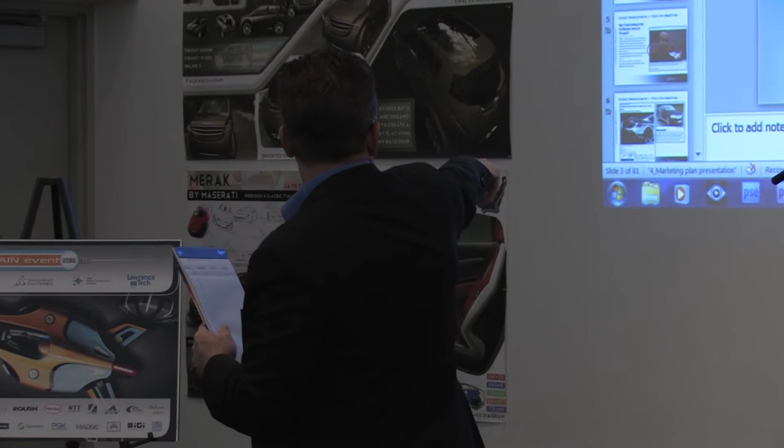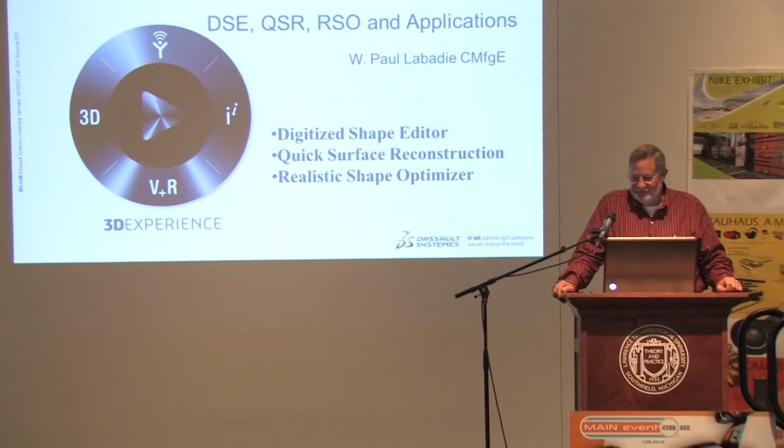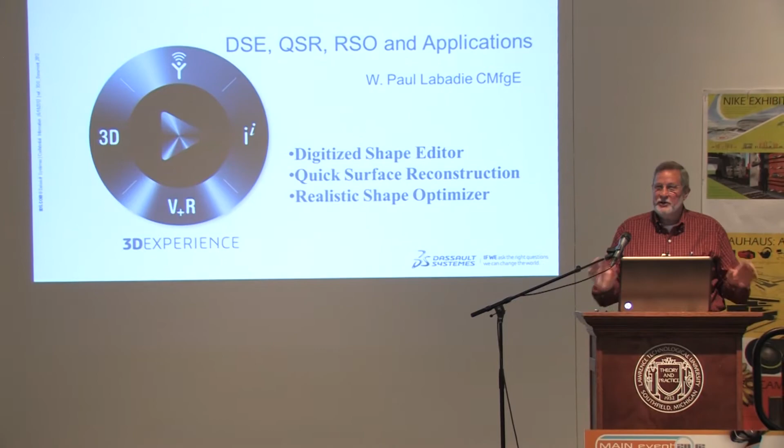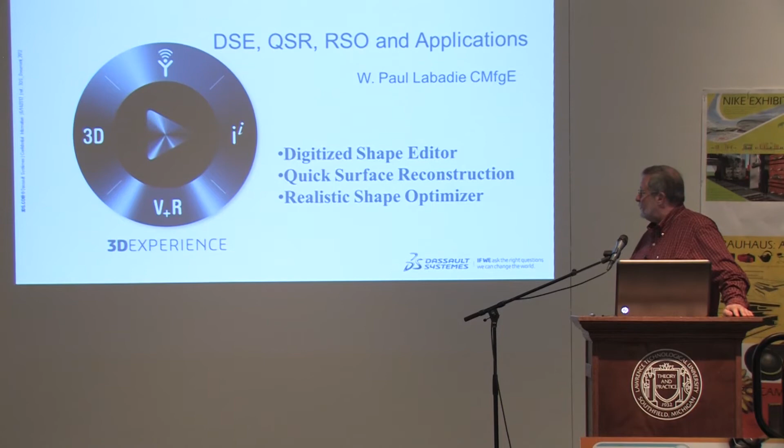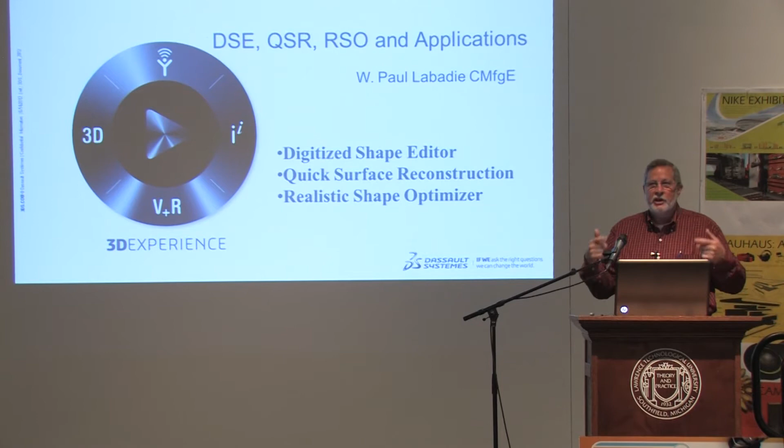Sorry about that. Remember Tony's opening comment about knowing the icons and knowing where things are? I'm not a Windows 7 person yet, I'm a Windows XP person. Who'd think you could take the whole thing down with one click? Apologize for the delay. I'm going to talk about the 3 different workbenches: Digitized Shape Editor, Quick Surface Reconstruction, and Realistic Shape Optimizer, and one tool that ties those together. Also, I have my grandkids to thank for a cold, so hopefully I'll be understandable — it's kind of echoing inside my head.

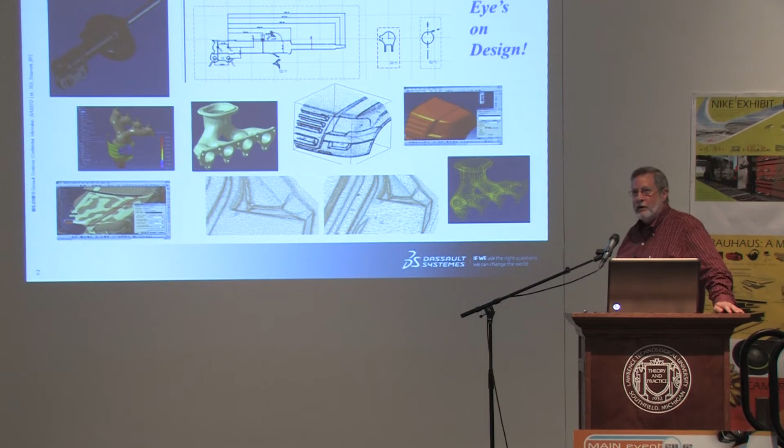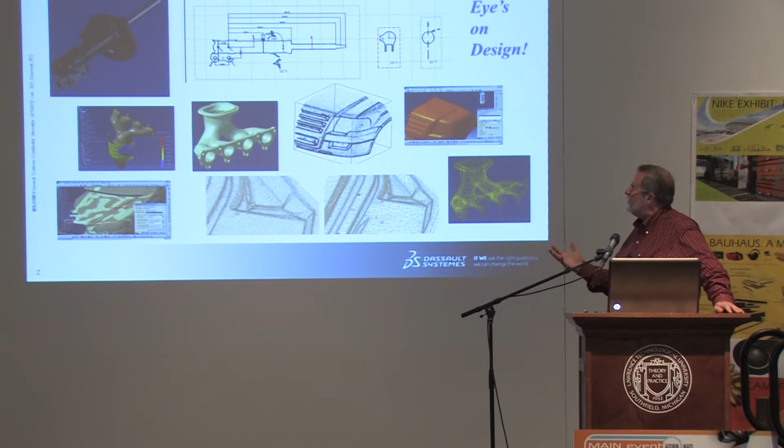It's just a different type of scan data. It's sectional scan data. Okay? And some of the tools that we talk about when we talk about Digitized Shape Editor is the ability to filter the data, to find the sharper edges, as we have right in the center of the screen, the flex front end. And in the bottom of the screen, we've got 2 scans. We have one on the left that looks more dense, one on the right that's less dense.

A lot of times the people that are doing the scanning will get too carried away and we'll end up with terabytes of data that is just too dense. We want to be able to filter that down and make it easier to work with. In the bottom left-hand corner, we're actually comparing some scan to some actual surface data. And you can see where the two overlay each other. Typically, when you've got a clay model and you scan it, it's going to have waves in it. And you want to build the smoothest, flattest possible surface through that type of data.

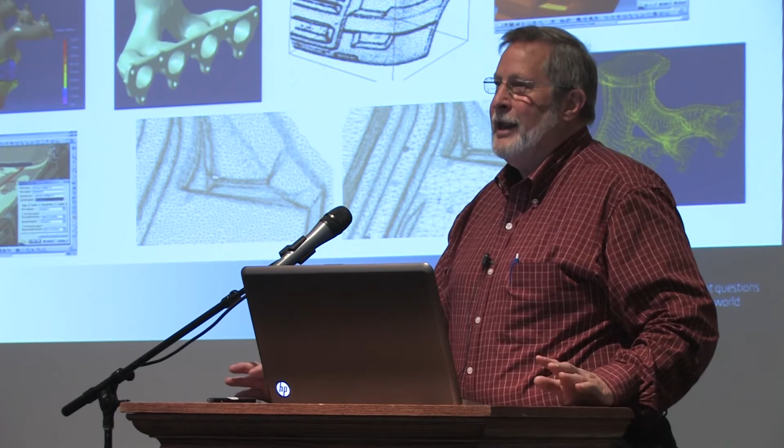Another reason for scan data that I didn't throw up here is in stamping tooling. A lot of times by the time the bench hands get done with the stamping tooling, so they can get the part out of the tool without the splits and the cracks and everything else happening, there's so much hand working done that there is no math data available. And stamping tools wear out. So now we have the problem of how do I capture the math data if I have to make another one? And eventually you will have to make another one if it's a long run. Okay? So there's a lot of reasons that we may want to look at scan data.

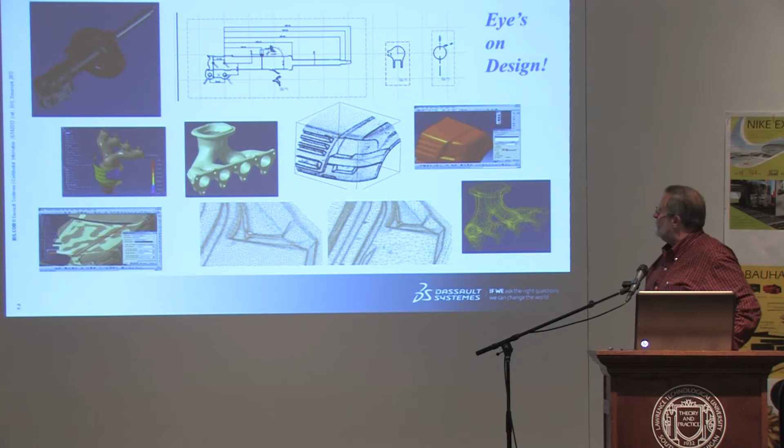I can also tell you that one of the busiest times of the year in the OEMs and Ford, Chrysler, I mean, I'm in the Chrysler, the basement of the world headquarters right now. I swear I see as many competitive vehicles driving up and down the aisle as I see Chrysler vehicles driving up and down the aisle. And they're all headed for being scanned or analyzed for one reason or another. And everybody does it. Okay? So these are some examples of the types of things you can do with Digitized Shape Editor.

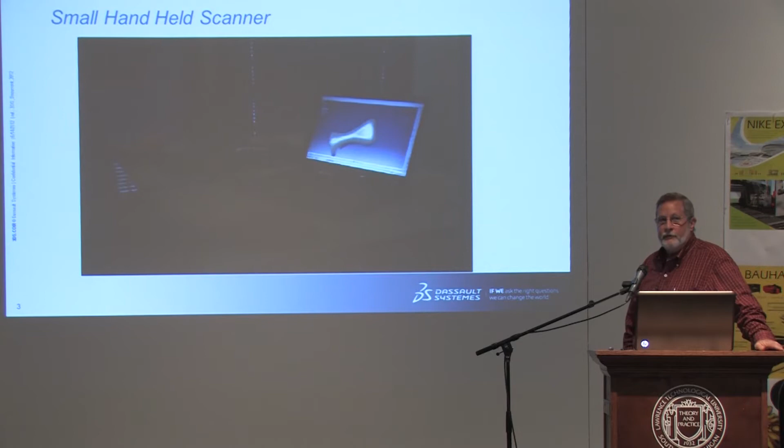And if we move to the next page, this is how quickly you could get data into your computer. It was a hand scanner. Directly into CATIA. I saw this happen at Dearborn Tool and Die. I was amazed. Just the guy threw a part on the table, walked up, hand scanned it, and there it was graphically. Math data, three-dimensional math data.

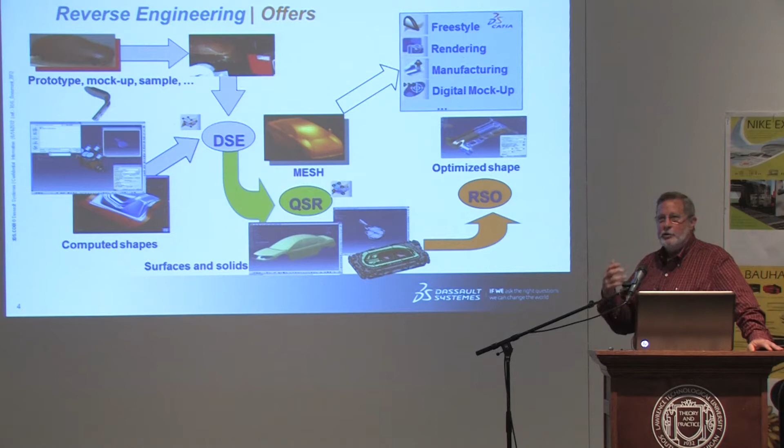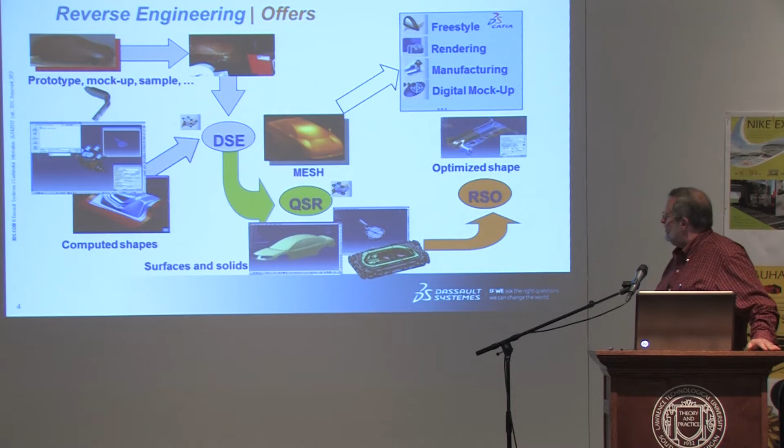Okay? How does this fit together? Typically, we're thinking of DSE, the Digitized Shape Editor, as what do I do with the scan data? If I want to edit it, manipulate it, massage it, going from that into Quick Surface Reconstruction. Once I've got the data smooth the way that I want, to cut sections, build curves, build surfaces. And after QSR, there is an option to go into RSO. And we'll talk about that later. It's Realistic Shape Optimizer. And these are how the pieces could fit or flow together.

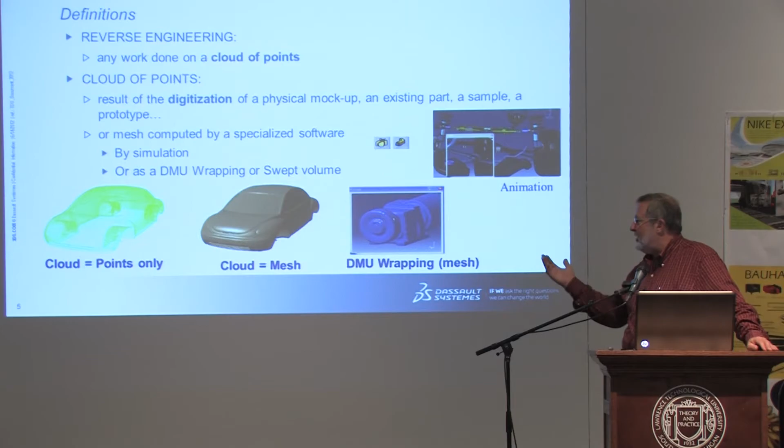By facets, what those are, for those that don't know, it's a little triangular surface between the three closest points. Almost like an FEA model, except they're only triangular facets. Sometimes I choose to only bring in the points. If I'm going to be massaging it and cleaning it up anyway, why bring the facets? I'll bring in only the points, and I'll add the facets later. You can cut sections through points or facets. The one in the middle has the facets, so I can shade that.

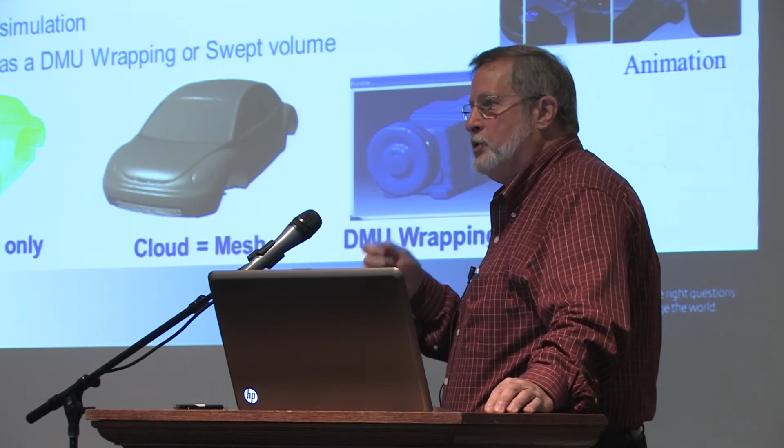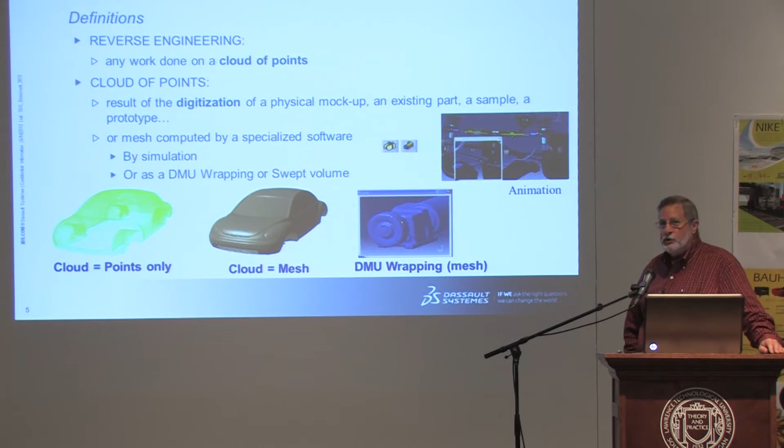Okay? There's other places that you can get this type of data. In the bottom right-hand corner here, with the DMU wrapping, if you take a part and you wrap it and put cellophane around it so you're not giving somebody else all the internals of your part, that's a mesh. And in the upper right, if you do any kind of animation and you want to have the swept volume or the wheel jounce stored, again, that's a faceted model. So there's other places you can get this type of data from.

How do you get it into the system? In the top left-hand corner, you've got the standards of ASCII and IGES and STL that I can read these point clouds in, or the scan data, and bring it directly into CATIA. Or we have special partners Creaform. There's also some other custom formats in the top right-hand corner.

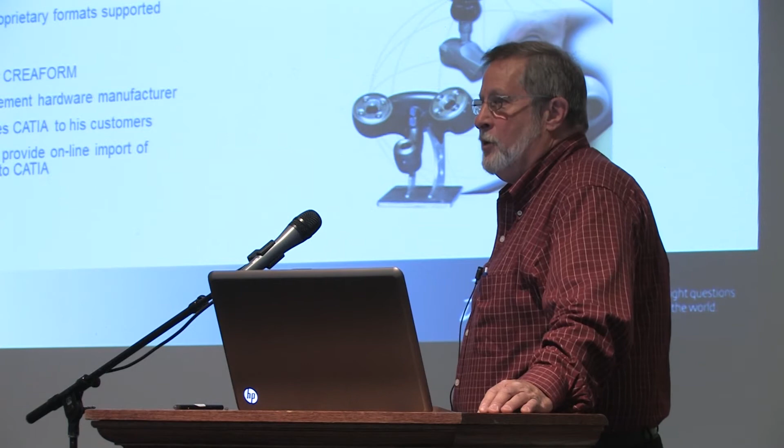It's kind of like post-processing for a machine, but in reverse. We want to be able to read these different formats so we can bring that data directly into CATIA. Okay?

Here's some examples of Digitized Shape Editor. I threw up some of these earlier, but in the top left-hand corner, when you're scanning panels, you're scanning parts, you're scanning tooling, unfortunately, you can't stop that light, if you're using a light scanner, from going down into the holes. Well, you really don't want that. You probably want to cut that area out. So you have the ability to edit these clouds and you can remove points.

The filtering in the center, again, we use the flex again. I could have that as a homogeneous filter. I could just have a point every 3 millimeters or every 6 millimeters. Or I could tell it I want more points where I have more curvature. So if I have more curvature, I want more points.

You may have, in the middle example, where it looks like there's spots or dirty spots. Those are places where I've got extra dense mesh that I don't want. I want it nice, smooth, filtered out.

The bottom one here is the decimate. The bottom left-hand corner, when I bring in this data, when I started working with Dearborn Tool and Die and we brought in dies, because of the way they were doing it, we were getting all the surrounding data outside of what we really wanted. So having that bounding box, and while I'm bringing in the data, being able to use that box to clip out what I don't want, greatly reduces the data right from the get-go. Okay? So that bounding box is very, very powerful for bringing in the data.

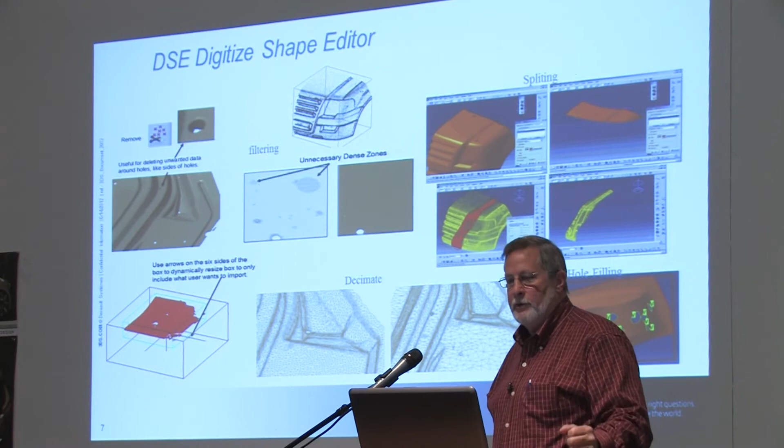Okay? And in the top right, you may not want to work with a whole area. You may want to use curves to section out an area you want to work with. You may want to just draw a polygon box around an area you want to work with, or use a paintbrush to highlight an area you want to work with. Only have on the screen what you want to work with, what you want to smooth or play with at that moment. Okay? So these are some graphic examples of some of the options.

You can import the cloud of points, optimize, create the mesh, optimize the mesh by decimating it, make it easier, cleaner, enhance the mesh, smoothing it, removing sharp edges. There's a nice little thing I like to do with a little bunny rabbit that's got all kinds of bumps and lumps. I've got like an iron. I can work that on the bunny rabbit and give him a nice smooth coat. So I can smooth out wrinkles and sharp places in a mesh.

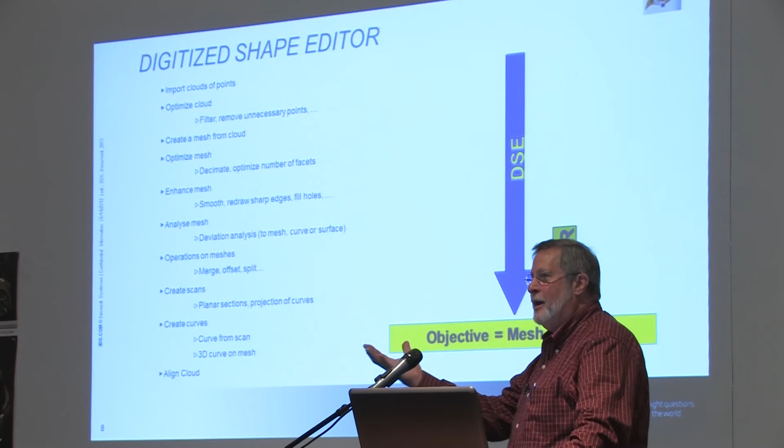Analyze the mesh, find out how it compares to something else. That deviation analysis command is extremely powerful. We're going to cover that in a section all by itself a little later. Okay, so you can also create scans, section your scans, merge scans, sew scans. More importantly, you can align scans. So when you bring in that data, we have tools to help you map that to other geometric data, so if you want to compare it or measure it to other data.

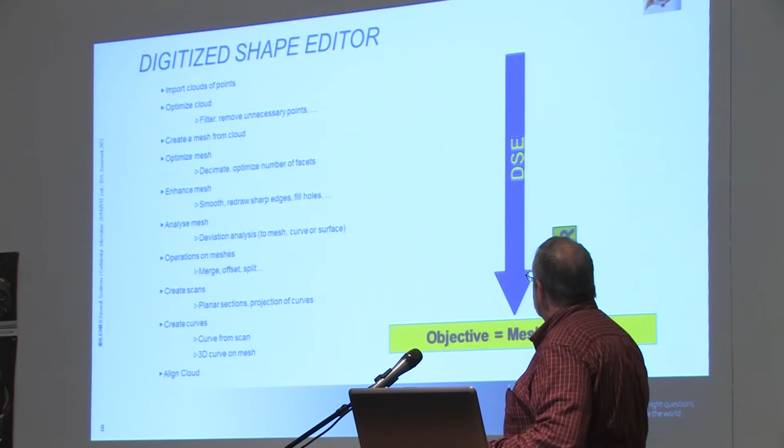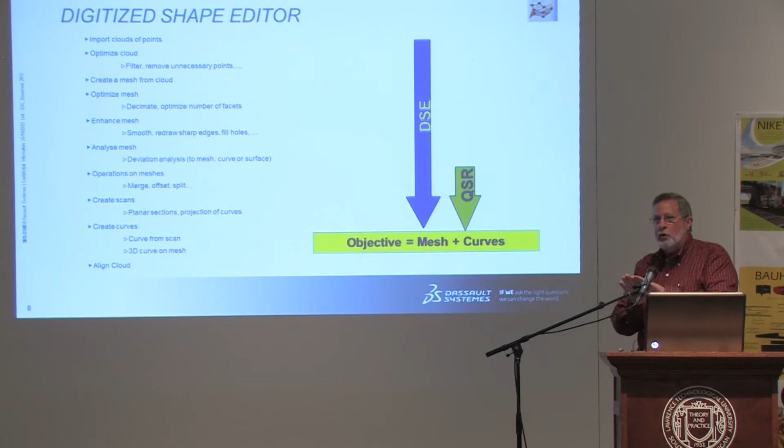Okay, this is the Digitized Shape Editor package. The arrows on the right, the blue arrow, that's all the DSE commands. It does share some of these commands with Quick Surface Reconstruction. So these two workbenches do overlap just a little bit. Okay? Here's some examples of Quick Surface Reconstruction.

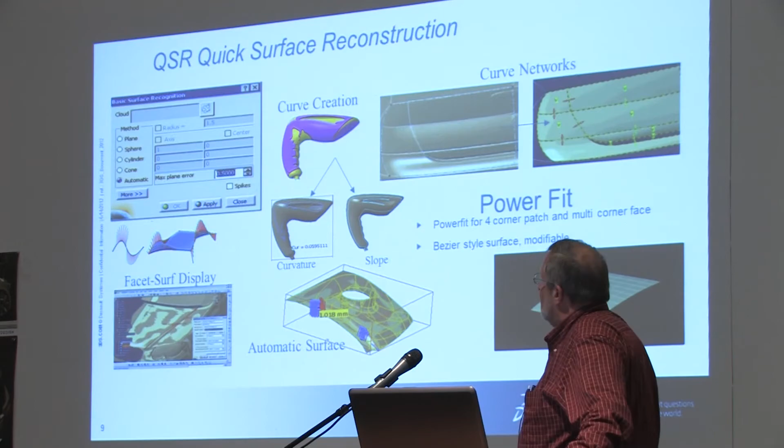Or in the top right-hand corner, if you want to build curves right on the mesh and smooth them, and build a network of these. And then I can generate what's on the right, which is individual surface patches, and I can control the tangency or non-tangency between those meshes. Okay? So these are some tutorial examples of what comes with the quick surface reconstruction.

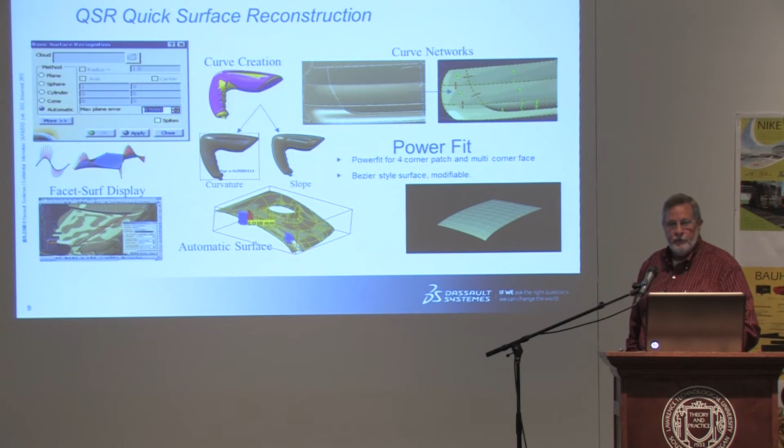If we go through the actual commands, again, you can create the scans, cut sections through it. While you're doing that, you can just get string data, or you can actually create nice smooth curves. Get your characteristic lines, whether by slope or curvature. Create surfaces from this data, either using a basic surface recognition. What that means is an example of the shock absorber. If I eliminate the scan back to where I'm only looking at cylinder type data, I can actually have CATIA put a cylinder right in there. And it'll be a CATIA cylinder that has all the parameters.

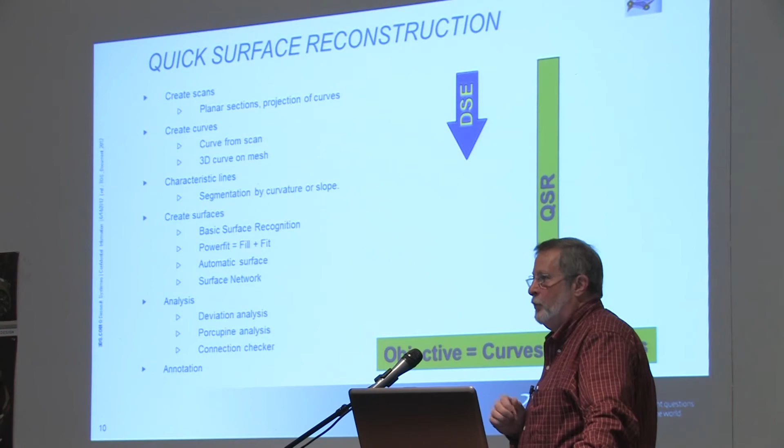So if it comes up with 3.99999, I can change the parameter to 4 and be done. So in the case of something that has piston shape, planar shape, basic types of shapes, I can very, very quickly capture that as fully parametric geometry right from the scan data. So that's basic surface recognition. And then you've got the power fit and fill, the automatic surface, and the surface network. And again, the analysis tools, the deviation analysis, this is in both the DSE and the QSR. This is one of the overlaps. And this is the one we're going to spend time on more in depth in a few minutes.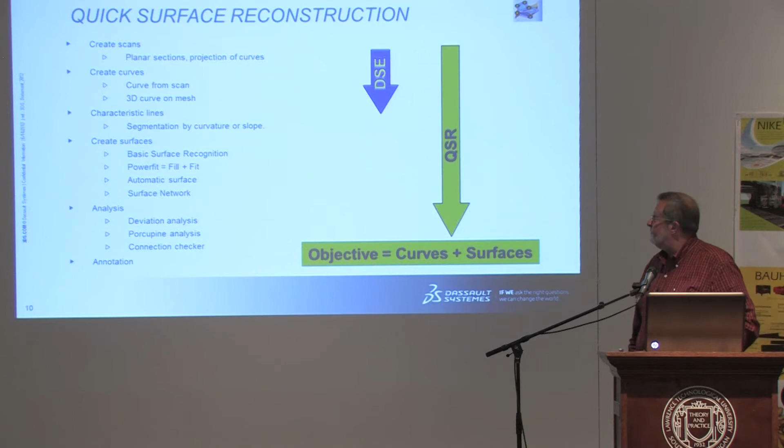That few minutes being right now. This command came out around 17 or 18. By the way, I didn't point out at the beginning of the presentation, everything I'm talking about is available in 18. Every one of these packages has enhancements above and beyond what we're talking about today. But I'm aware a lot of our current customers are on 18. So if I start the presentation at this level, we can show you what's been added at a later date. But this you can take home today, use today. Okay?

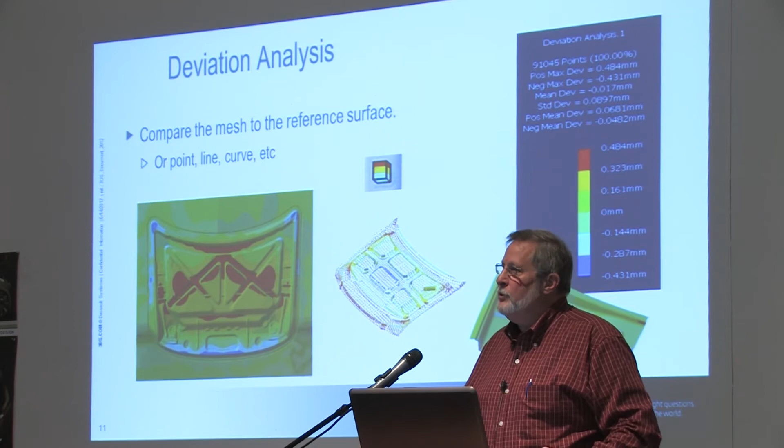Deviation analysis. You can measure between that scan and a surface. You can get point pictures in the center that'll show you the color, and it'll show you this color bar on the right. And you can look at that very quickly and see just exactly where it's deformed or by how much it's off. This is very, very powerful when you get into stamping data. Because if you want to pull a whole area of a panel, you know about how big that area is. And this display stays there. So you can actually use it to draw around. Or better yet, what we'll get into later, is actually use this data to change the geometry, alter the geometry.

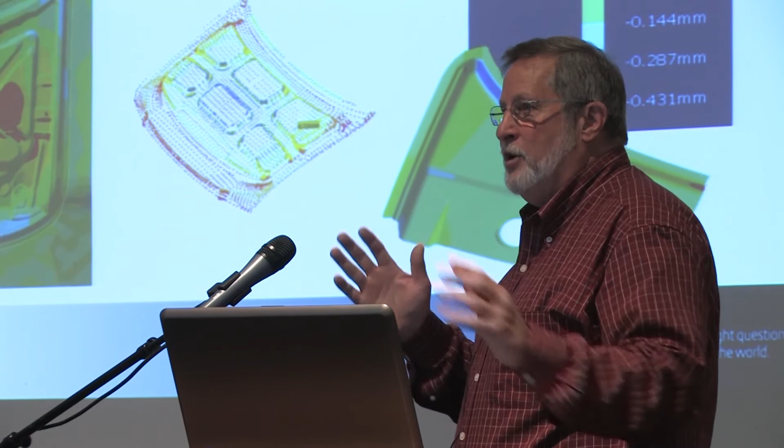We also have texture mapping, which is on the far left. I can tell you right now, some of the images I've seen of how this was done in the past is by going in and taking point measurements and having a picture that's actually 36 different pages of a bunch of annotation of where every little point is off and by how much. This is so much faster and easier to be able to see where my panel warped from the stamping process, or if I want to compare it to a design.

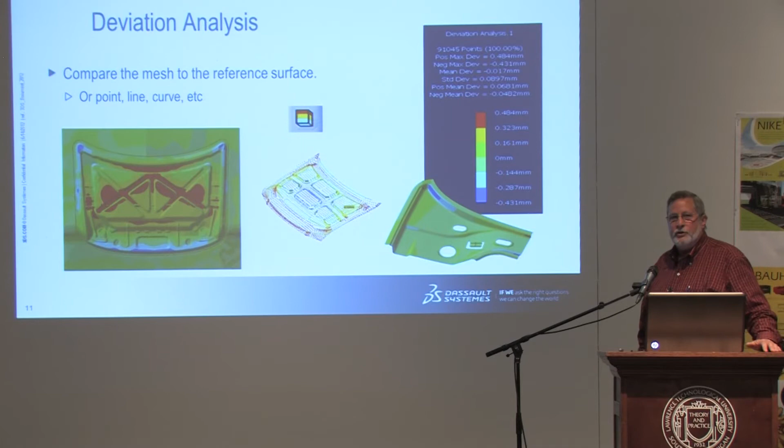Okay? Along with the deviation analysis, you have the different ways of that color bar. You can control the range of the display, the colors of the display. You can change the accuracy, the feedback that you're getting from it.

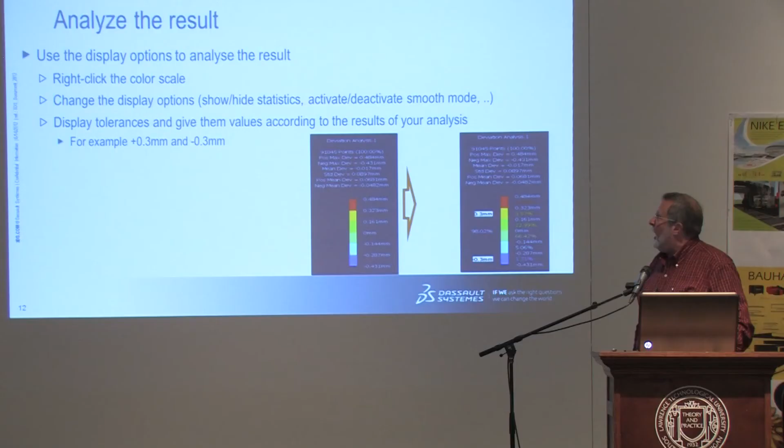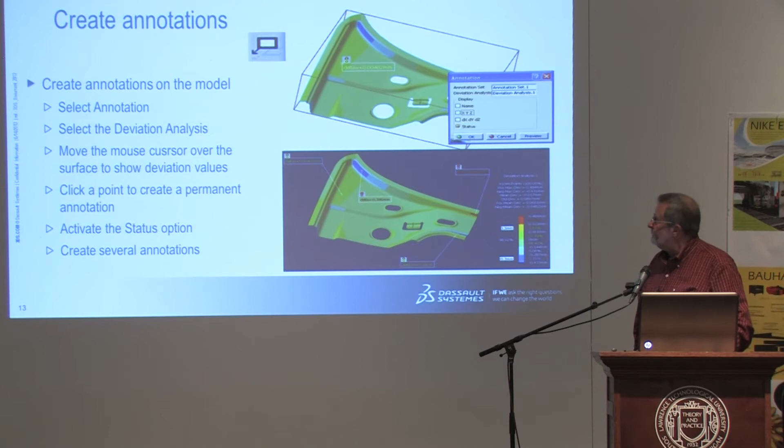After you've done one of these deviation analyses, you can actually go in and annotate it as well. So you can actually go in and record where these different locations are off and by how much. Okay? You can also generate a report and export the report.

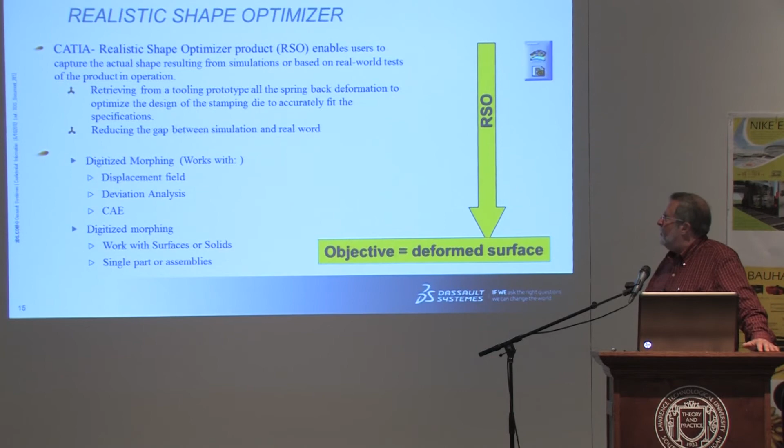Okay, realistic shape optimizer. This is the third tool that we're going to talk about, the third workbench. And what this is for is turning surface data, solid data, into like moldable clay. And how do you want to mold it? Okay? There's three different ways that I can mold that. I can do it with what's called a displacement field down in the middle of the screen, or deviation analysis. That's that command that exists in both DSE and QSR, or by using a CAE analysis.

Okay? And at the bottom I'm pointing out that it does work with surfaces or solids, single part or assemblies. And it doesn't share any commands with DSE or QSR, but it uses some of the capabilities of DSE and QSR.

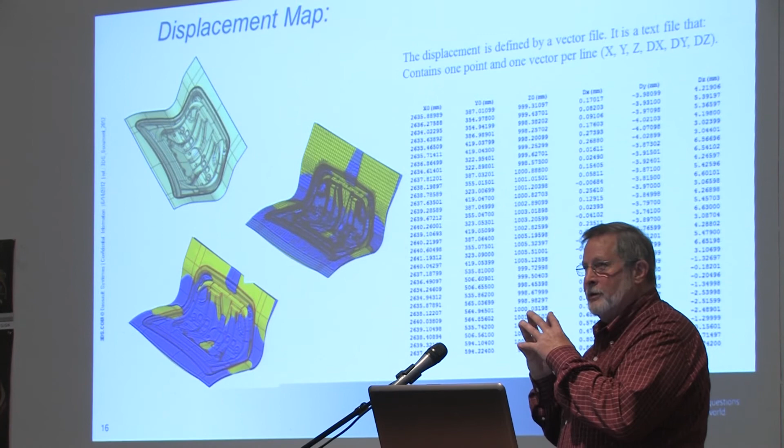And then the right, it looks like two finite element models, and one has been distorted. The word that the vendor chose to use was disturbed. You have the regular mesh, and then you have the disturbed mesh. And they had their calculations for how they thought the panel was going to alter under the stamping operation. And what they wanted to do is they wanted to take the difference between those two and map it into a change in the surface.

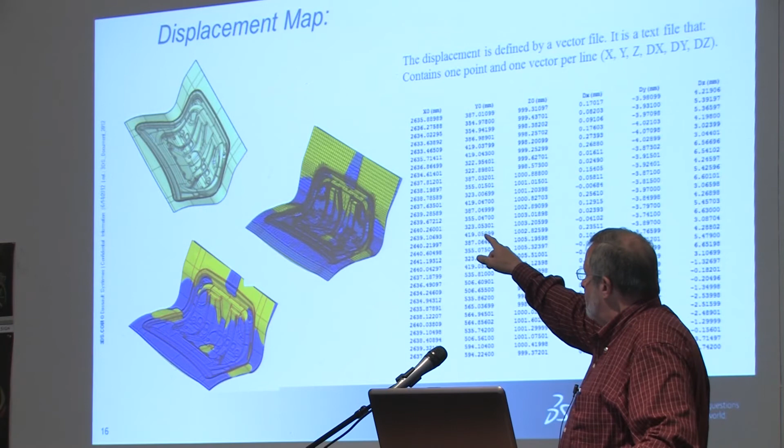When the command first started out, we were actually picking one CAE, picking the other CAE, and generating this displacement map. But then they got down to where we were actually creating their own displacement map. And it's just a text file. So if you have your own way that you want to create this text file that has the XYZ and then the delta XYZ, you can take what's on the top left and generate what's in the bottom right, which would be a closer example to how you expect that panel to come out of the stamping tool. So when it releases, it springs back into the position that you wanted to begin with.

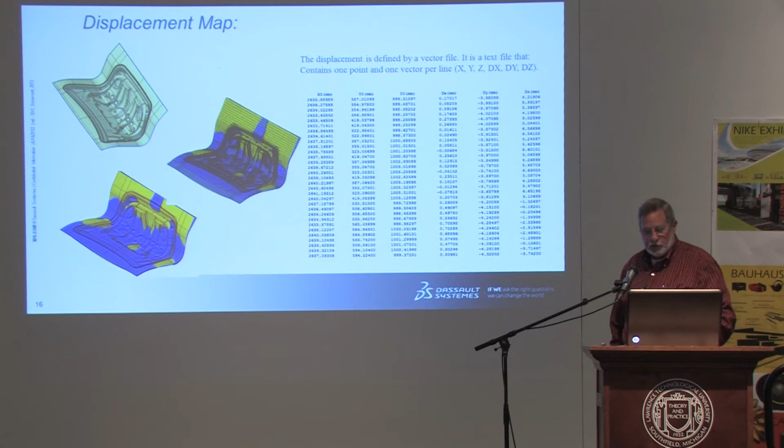Well, what if I just did a scan, brought it back in, did a deviation analysis between the scan and the product? That's going to give me a measurement for a couple of 100 points in that area. Well, what if I now could use that to distort the original surface in the opposite direction and scale it?

Okay, so what I'm talking about is when the panel comes out of the tool, I know I'm going to have to alter it again. And I'm going to have to alter it by maybe 1.3 times the distance that it's off, because it's going to spring back that much. There's always a percentage add.

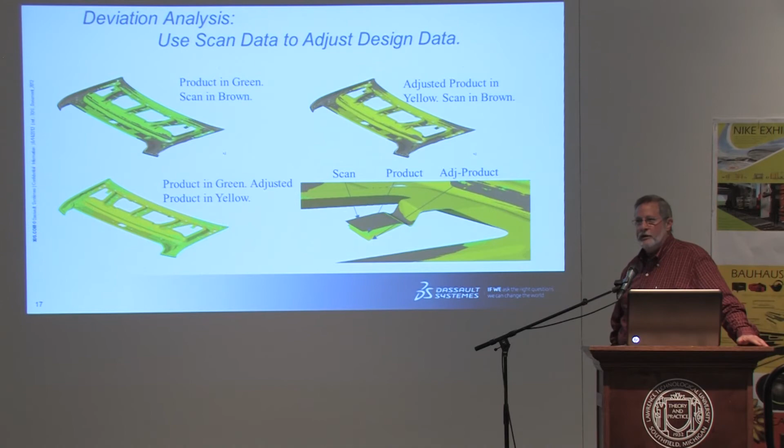Okay, so by using the deviation analysis, I can actually morph from the original product and come up with a new product that's scaled and in the opposite direction. So now when it comes out of the tool, it should come back in the exact right position. Okay.

This deviation analysis, I pointed out in one of the first slides. Actually, I don't think I did point it out. My bad. It's not just measuring between scan data and a surface. It's not just measuring between two surfaces. It's also not just measuring between two sets of scan data. I can actually measure between a point and a scan, a point and a surface, between two lines. Okay? And given that flavor, I had a little fun with this.

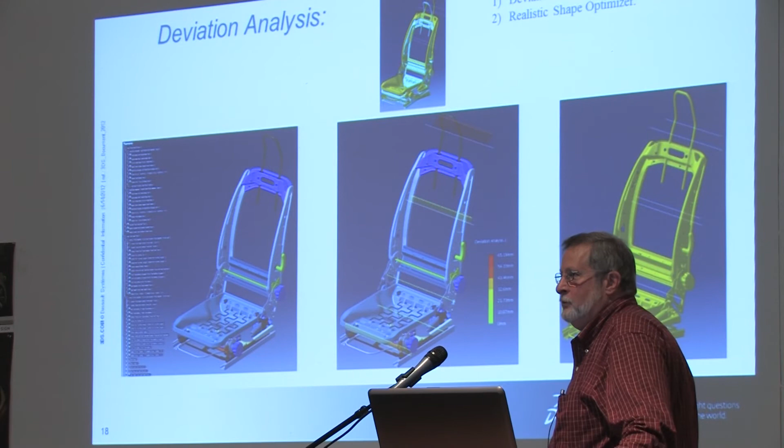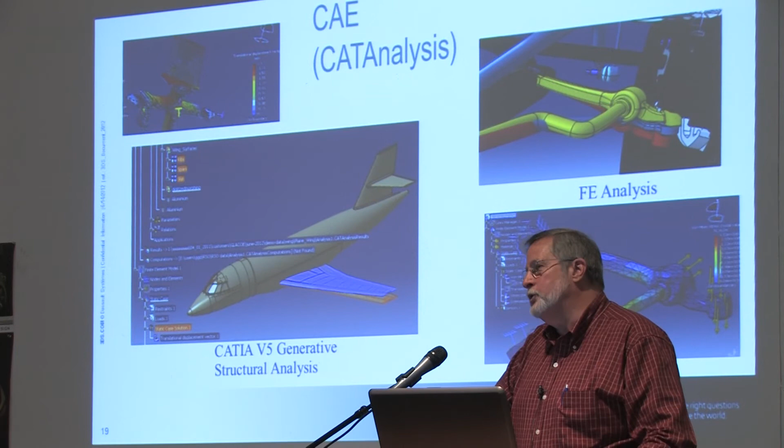And where that comes into play, and where a lot of this comes into play, is a lot of times it's not the part that we're planning to build, it's the part that's under load or under stress, or the part that gets sat in. What does it look like at that point? That's where I want to check my clashes and my interferences. I want to check it as built and also as under load. So this is a very quick way of getting that under load part.

Okay, we're going to get into our demonstrations here. When I get into the demonstrations, it's going to be a movie running in the center of the screen. And on the right hand of the screen, I'm going to have the steps that are going to be run through in that part. I don't want to try and talk through it. I'd like you just to watch the AVI. And every step is captured. And where I've edited for time, I'll let you know.

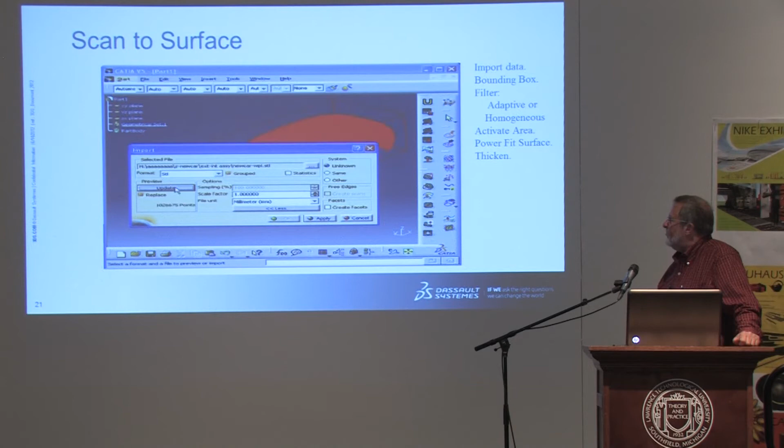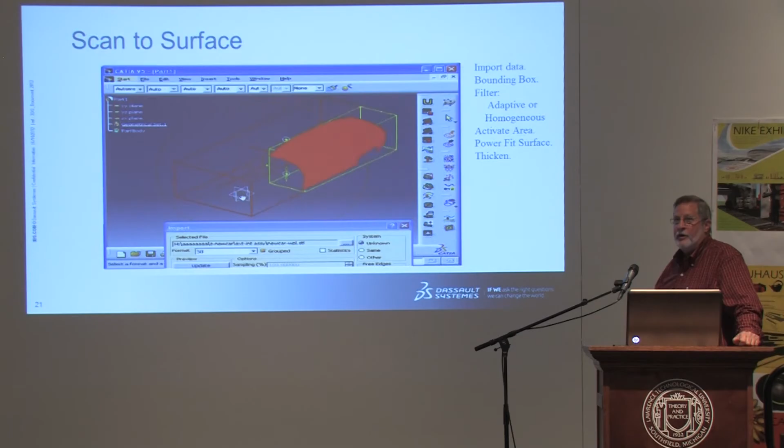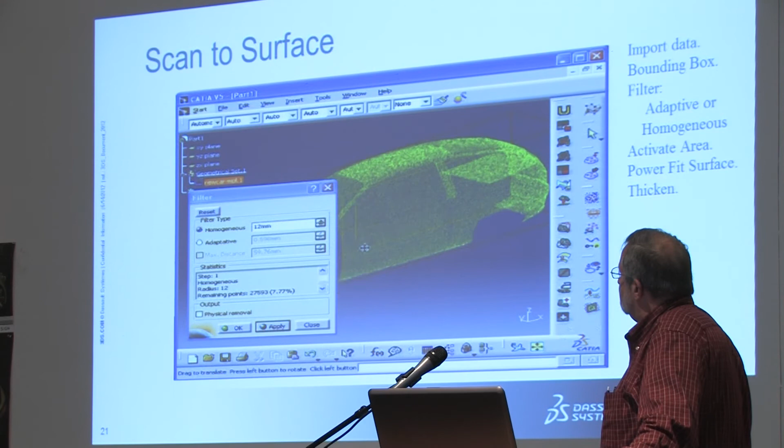When you hit the update command, that reads in the file. That also brings up that bounding box. If you don't want to work on the whole car, you just want to work on the door, how do you quickly throw away all the other data? Better yet, don't even bother bringing it in. Remember that quick filtering for adaptive? It happens this quick, by the way. Very powerful.

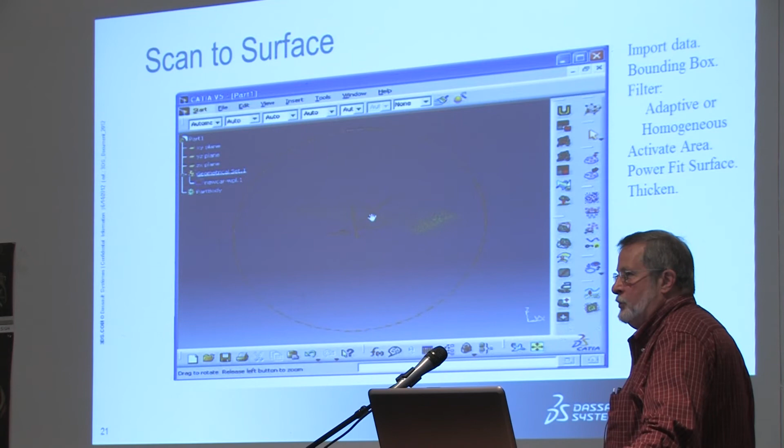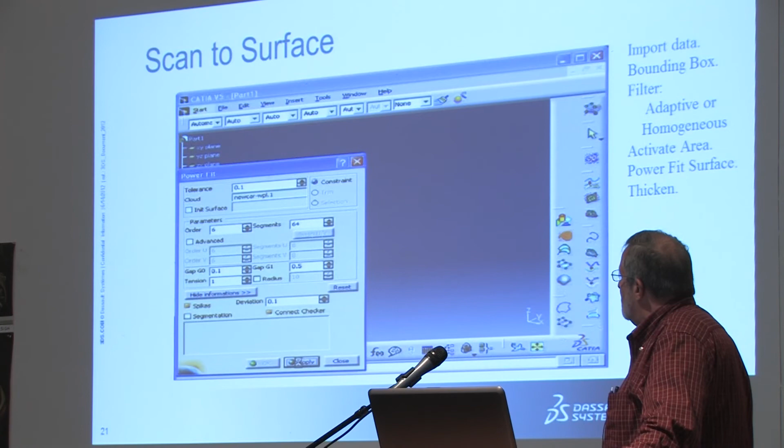There's two ways to turn off points. One is to actually delete them out of your file. This is saying I only want to activate, and I'm using the polygon. As you can see, there's a lot of other options on the panel. The rest of those points are still there. They're just more or less blanked. Going to the Quick Surface Reconstruction workbench, and I'm going to put a surface through that mesh. Now we're going to bring back the rest of the points.

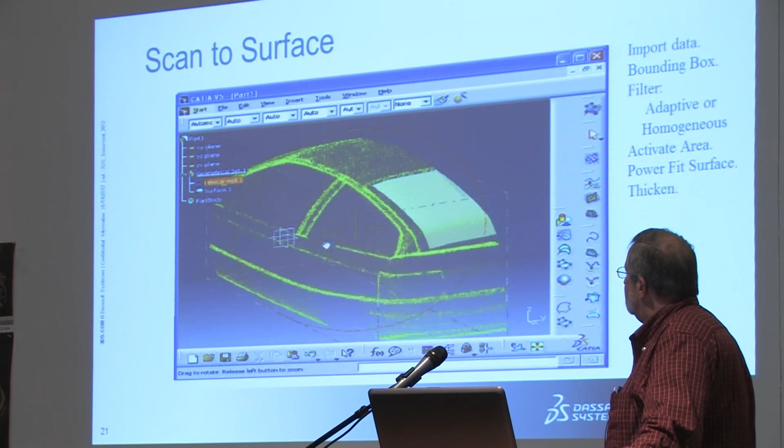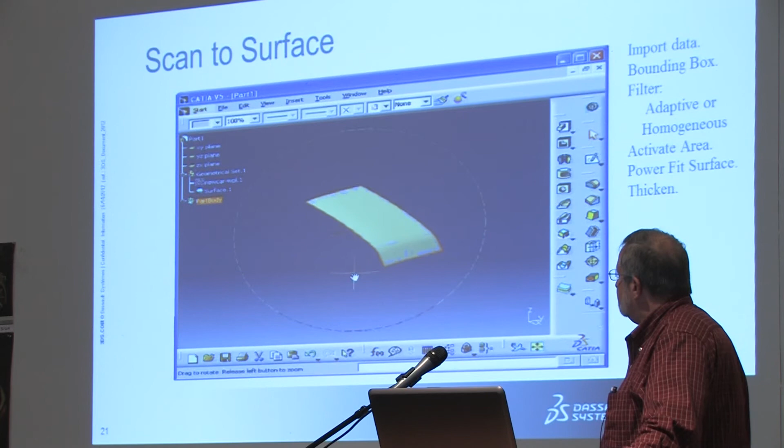This is probably a needless step. I haven't seen a lot of customers taking their solids or their faces and offset them to get thickness yet. I've seen a few of them playing with the idea, but that's just part design. Okay, that's one example of how you can quickly get to a surface from a scan. Just bring it in, limit the area you're looking at, filter it, throw a surface in there.

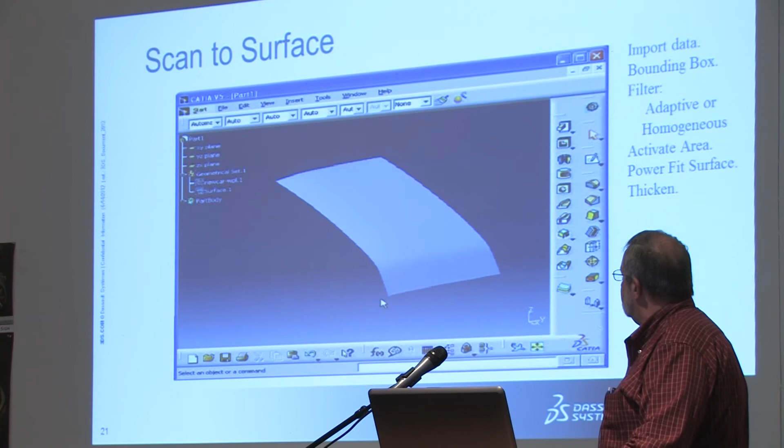This next one is to go to a solid. What's going to be unique about this is the fact that there's the capability to create a CATIA sketch right from section data through a scan. And yes, it's a brake pad. Got to cut two sections through the beginning.

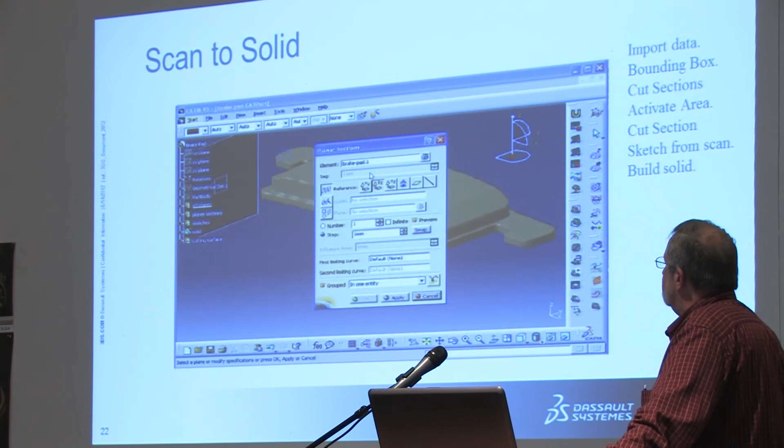For the top of the part, I wanted to turn off most of the mesh. If you remember, I said earlier that when you turn it off, you're hiding it, and whatever you're doing to it doesn't take what's hidden into account. So if I wanted to create a planar section through that top area, I didn't want to catch the rest of the part.

And you can always bring the rest of it back if you want.

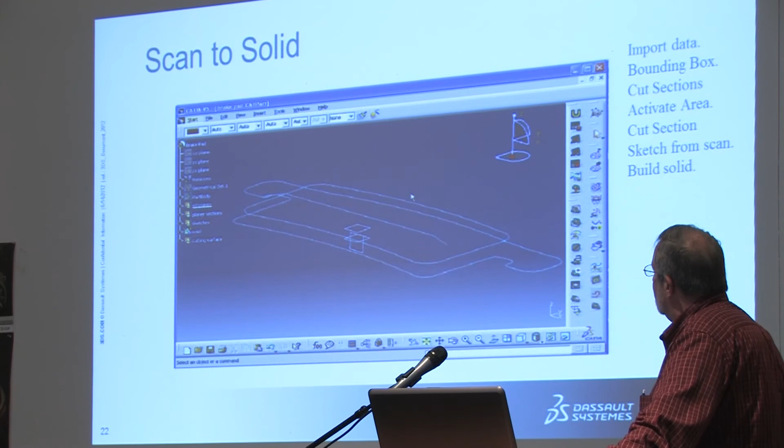And now we're going to take one of those sketches, and turn one of those planar sections into a sketch, a continuous sketch. You're going to see in this tool the ability to control where I have my tangencies. You're also going to see that I can ask for primitives.

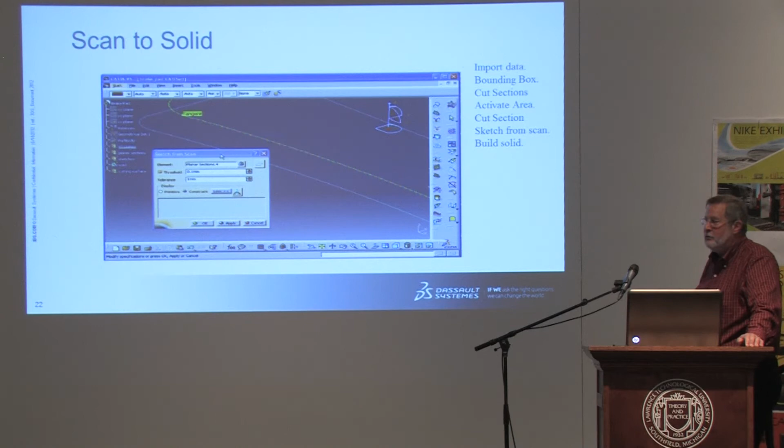It may be a spline, but I want to put an arc in. It may have come out wavy enough that it wants to put a spline in, but I can force a line. So I can control what type of geometry ends up in the sketch and where the tangencies are, or let it automatically default to what it thinks is best. You've got lines, circle, ellipse, different choices, different options.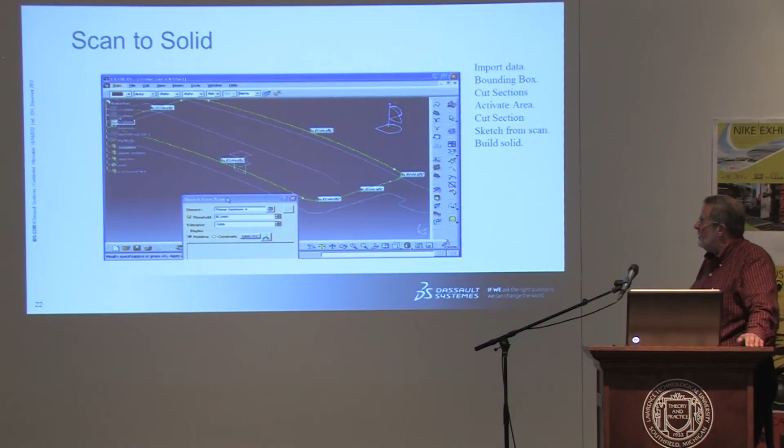This becomes a regular CATIA sketch as if I had done it in CATIA myself without the scan, but I'm using the scan data, which of course I can then take into part design and turn into a solid. And we're going to see a little demo magic after this, because if we saw one done, we don't need to see a second one done.

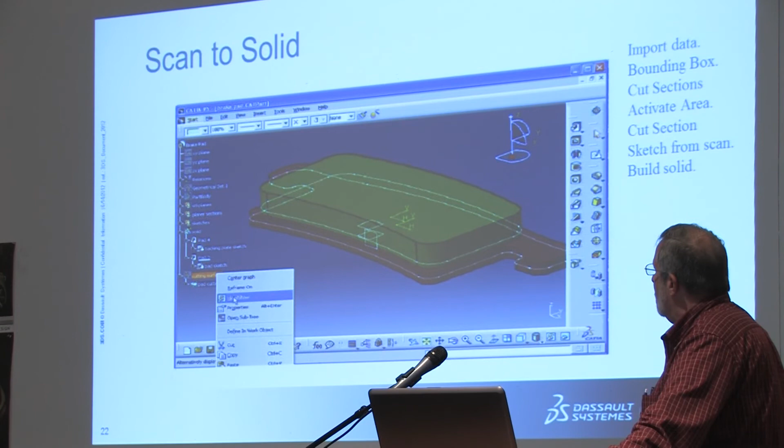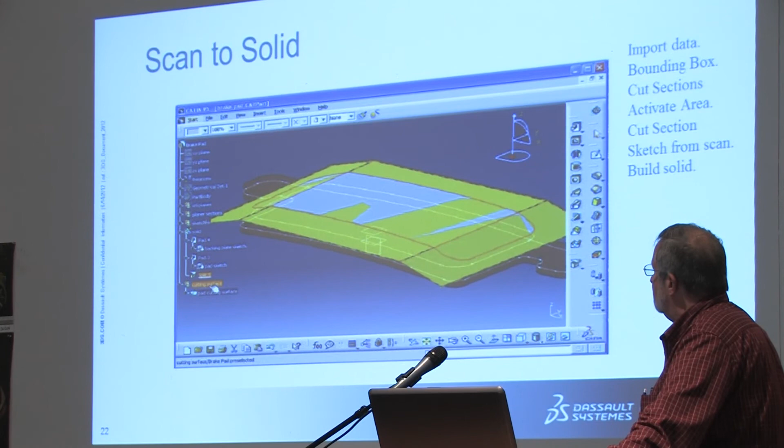So a quick thought-provoking thing for you: if I'm in the business of making these parts, and I didn't get selected to make this part, so I stop at AutoZone, grab one, and get a hand scanner, how long before I'm making this part? And I know it'll fit, right? Pretty accurate - it's math data.

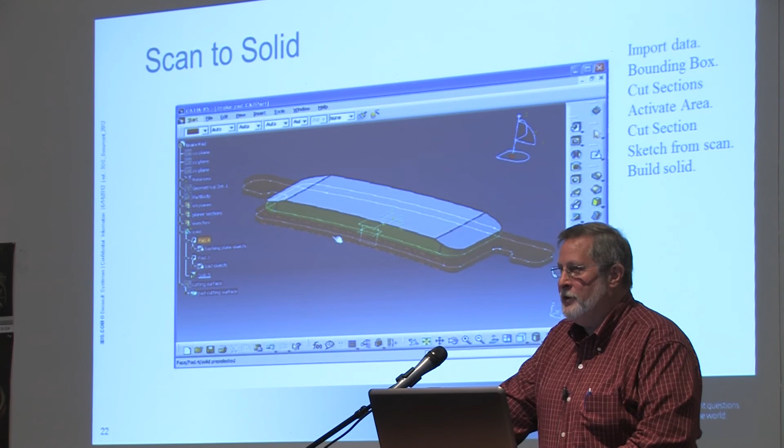Okay, this is the airplane wing that I talked about. There's a stage in this where you're going to pick the geometry that you want to alter - this is an example of the RSO. And then you're going to pick what's going to drive it, and it's going to create this displacement map. It's going to ask you for the name of that displacement map.

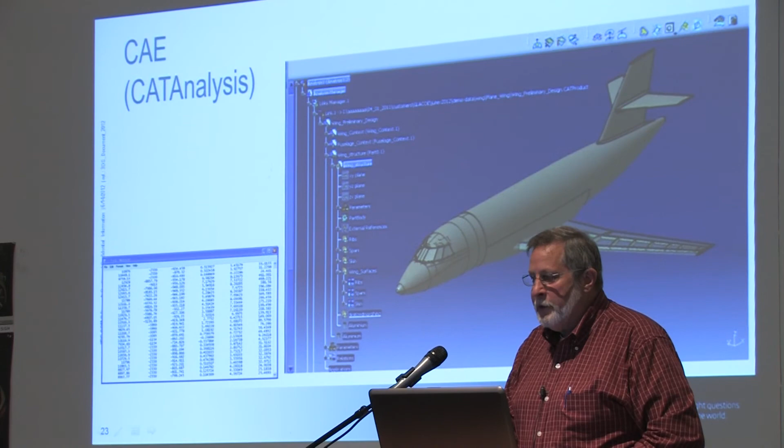I've already got the picture in the bottom left-hand corner. The displacement map is that XYZ IJK. So working from the analysis, it creates a displacement map for you. Let's pick the screen and watch the movie.

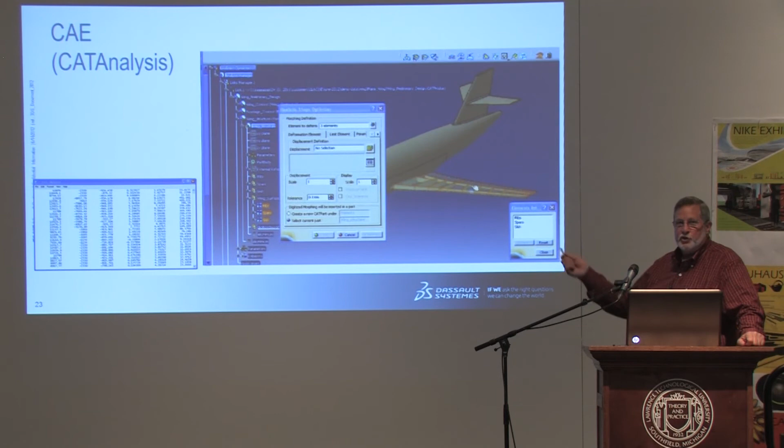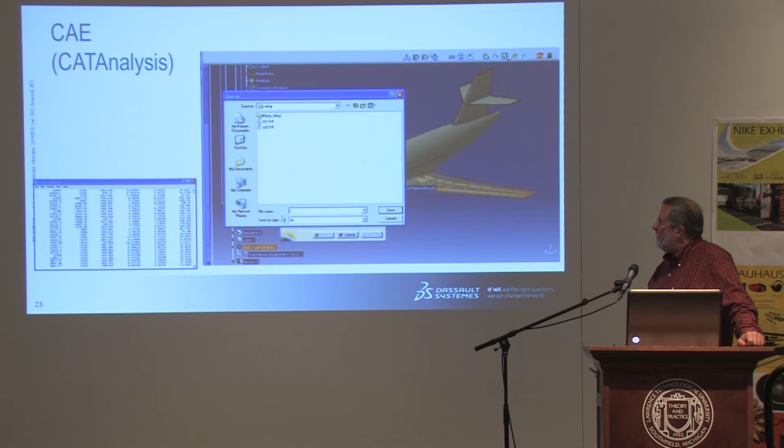So here I'm going to pick three sets of geometry. In the case of the car seat that I did earlier, I just windowed everything. Here, instead of a displacement map, I'm going to pick a CAE analysis. It asks me for a file name so I can write it out. And then there's a little bit of demo magic here.

Even at a tolerance of 5 millimeters, it takes 2 or 3 minutes. At 0.1, it took about 10 minutes. So this is only going to take about 30 seconds. But here I'm going to see the wing in its deformed state based on analysis.

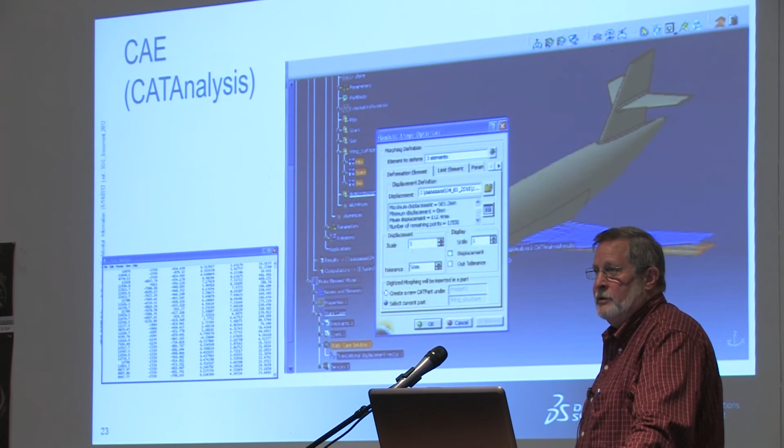And this is actual 3D math data. I can do clashes, check for clearances. Everything that we're doing with this DSE, QSR, or RSO, it's all math data. It's machinable data - I can dimension it, cut sections through it. Okay?

At that point, I guess I would ask if there's any questions.

Is anybody using this today? One? Where are you from? Ford. So you know Lloyd Vandenbrink? Yeah.

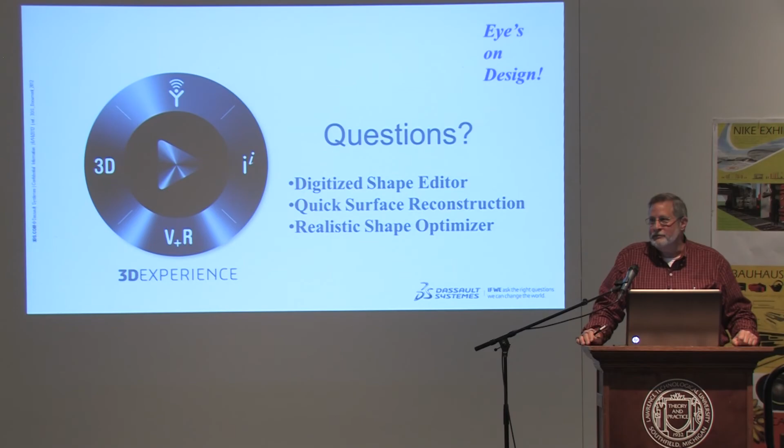Nice guy, super guy. Yeah, for those that don't know, this is a very, very iterative process in the studios. They scan it, put nice smooth surfaces through it. They only ever deal with half the vehicle, so of course that center line is an issue - you have to mirror the surfaces and then check them for tangencies and whatever. Again, the surfaces are used for machining, and sometimes they'll use scan data for machining. But it's an iterative thing: scan it, sweeten it, machine it. Don't like it, put some more clay on it and do it again.

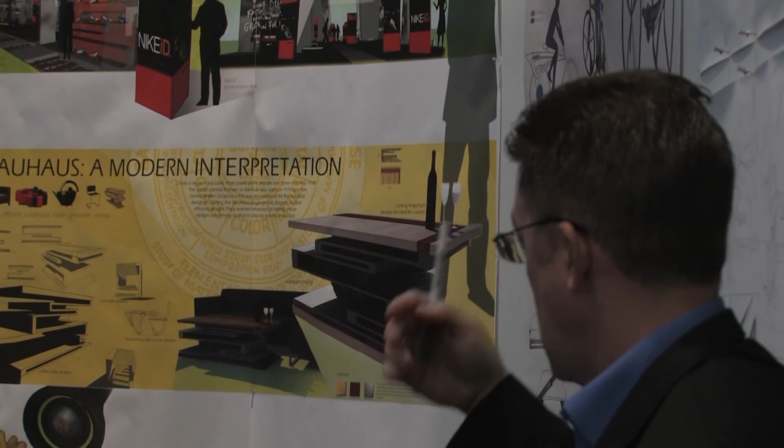Lots of fun. Paul, at the last meeting, many of our members were asking about the prerequisites for a lot of capabilities to demonstrate. Maybe you've already covered this, but could you reiterate what they would need within CATIA in order to have this capability?

DSE and QSR are pretty much standalone. You're just bringing those into native CATIA.

Anything that you've got. MD2 or MD2 and version 5? No, for RSO you've got to have GSD though. Okay, and Generative Shape Design? Generative Shape Design is part of HD2.

Many of our members have told us that they have a conglomerate of licenses, but they're not quite sure what capabilities are in that conglomerate. We're going to try to help you every meeting to show you some of the capabilities you may not realize you already have, and those that you can advance to with your current prerequisites.

Question over here? Yes, sir. I had a question. Your surfacing capabilities, how does it compare to a tool like ICEM Surf, where they do zebra stripes and all that stuff to make sure that the surfaces are...

Well, ICEM and CATIA are one and the same now, aren't they? I mean, there are still, the ICEM workbench has some different tools. The CATIA workbench also has zebra striping. Which one you feel is better, which one you prefer to use, that would be your choice. So this is what the OEMs are using to do the surfacing?